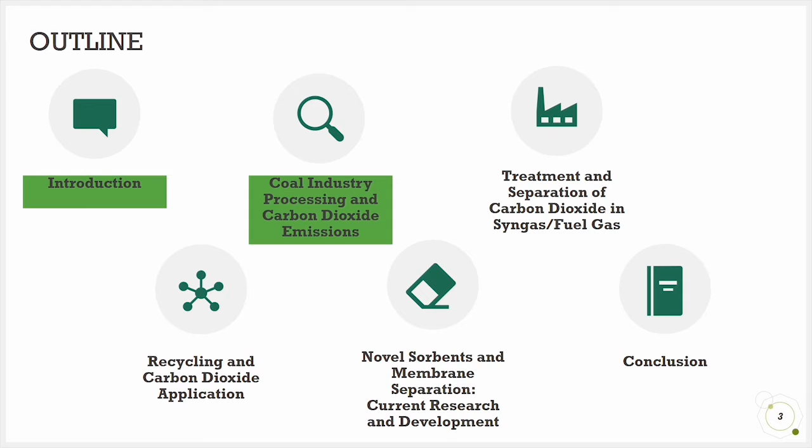Okay, next. This is an outline of our material. The first is about introduction, and then the coal industry processing and carbon dioxide emission. The next is the treatment and separation of carbon dioxide in syngas or fuel gas, and then the recycling and carbon dioxide application, and the novel sorbent and membrane separation, current research and development. And the last is about conclusion.

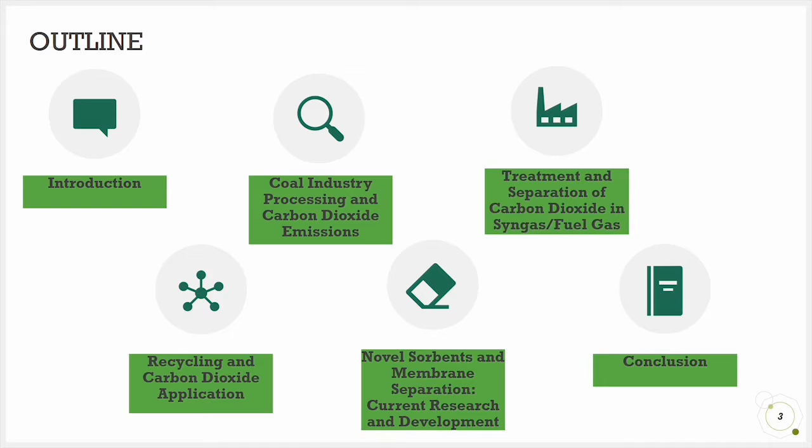The first is introduction. One of the issues that is trending is the addition of greenhouse gases, which causes global warming. Without greenhouse gases, the earth will be too cold and become an uninhabitable place. However, if there is too much CO2 in the atmosphere, global warming will occur. As a result, high sea levels can drown small islands, drought and floods, and so on.

The coal industry is one of the largest contributors to carbon dioxide emission for its unit of energy produced. Due to its high carbon content, coal accounts for about 44% of global CO2 emissions. In addition, according to International Energy Agency research, there was an increase in CO2 emission figures from 1971 to 2011, which are shown in the following graph.

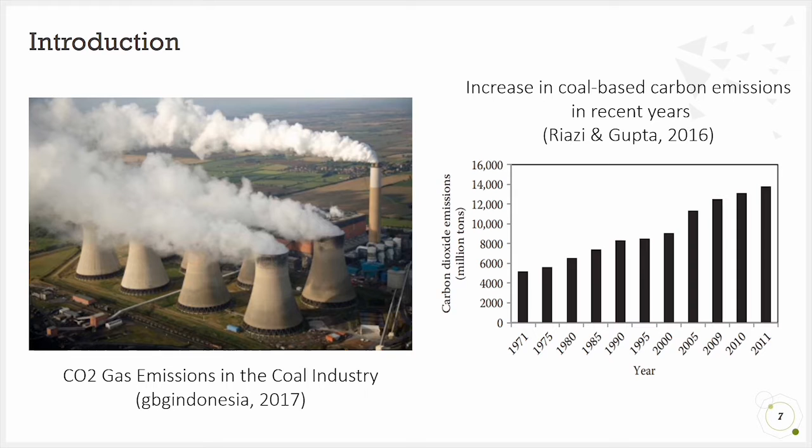And the next is coal industry processing and carbon dioxide emissions. Coal is an important source of energy, and the reliance on this fossil fuel for electricity generation is growing. The combustion of coal adds more carbon dioxide to the atmosphere than does the combustion of other fossil fuels. Because of a growing concern over the possibility of global warming, a phenomenon characterized by an increase in Earth's surface temperature, caused by increasing levels of greenhouse gases.

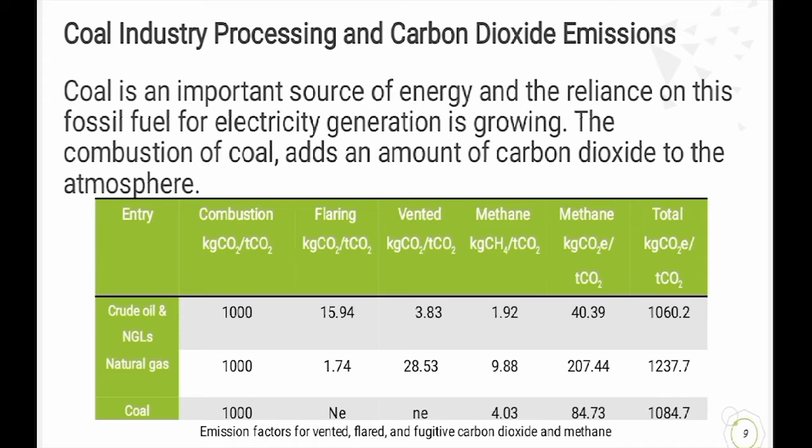And this table is emission factors for vented, flared, and fugitive carbon dioxide and methane. There are two kinds of ways of calculating the amount of CO2 emissions, namely calculation based on a stoichiometric reaction and a mass balance process. And this picture explains the mass balance scheme.

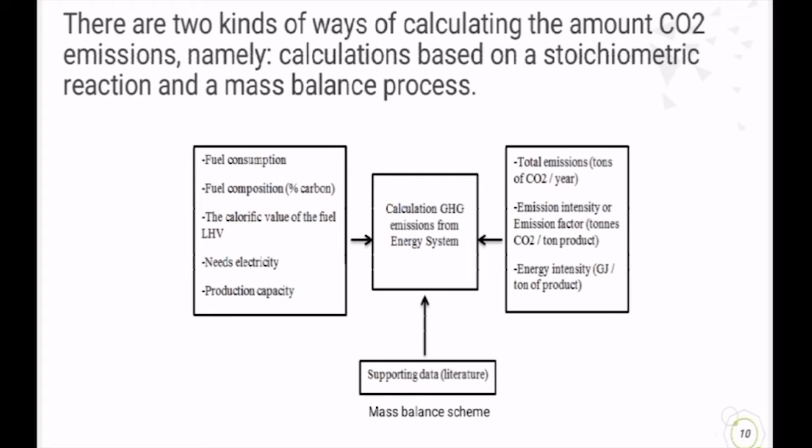And the next, there are various ways to process coal before combustion to produce energy, namely first PCC. PCC or pulverized coal combustion is a well-developed technology for coal-powered generators. There are many of its kind implemented around the world in developed and developing countries. Pulverization is needed to maximize the surface area for combustion.

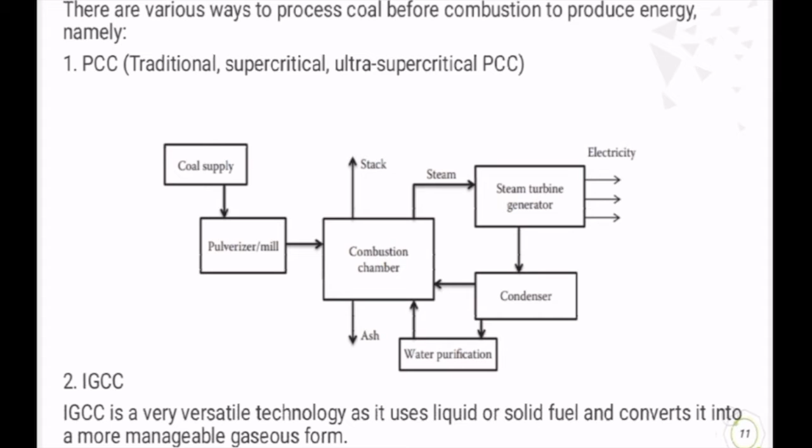And the second is IGCC, Integrated Gasification Combined Cycle, a less developed technology compared to PCC, but the benefits to the environment by IGCC are far greater. The following will give a description of the gasification of coal and the idea behind a combined cycle. And the third is FBC or fluid bed combustion.

FBC is typically implemented with PCC, IGCC, or oxy-fuel combustion to improve combustion or oxidation reactions. FBC is a cleaner method of combustion, but it sacrifices efficiency because of its low operating temperatures and the energy needed to fluidize the bed. Due to low combustion temperatures, there is no formation of nitrous oxide. FBC technology is also beneficial because it can use a variety of fuels such as low-grade coal, biomass, or waste-derived biomass fuels.

The last method is oxy-fuel combustion. While PCC and IGCC technologies require the separation of CO2 from the flue gas or syngas stream, oxy-fuel combustion is unique because it produces a highly pure CO2 that will require little or no separation. Rather than combusting coal using air, oxy-fuel combustion drives toward complete combustion by feeding pure oxygen into the combustion chamber. Thus, the reaction products will be water vapor and CO2.

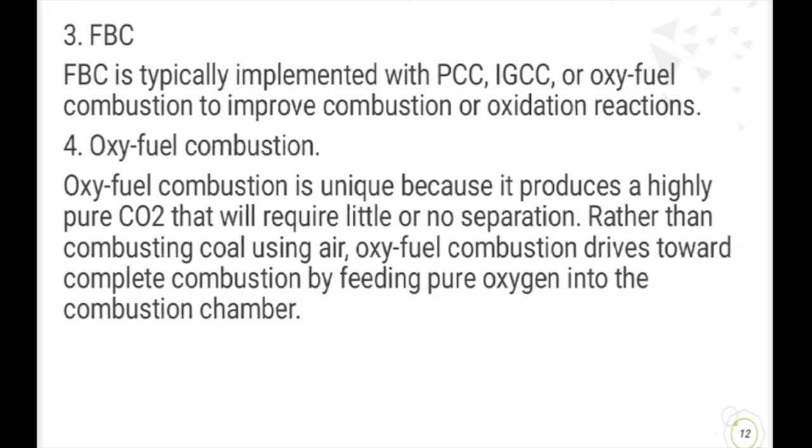The next material is about treatment and separation of carbon dioxide in syngas or fuel gas.

Carbon dioxide gas is an important gas for living on the earth. For example, carbon dioxide is important for plants because plants use carbon dioxide as raw material for photosynthesis. Carbon dioxide gas gives 50% contribution in global warming, while other gases like CFC give 20%, CH4 15%, ozone 8%, and NOx 7%. Carbon dioxide has the ability to survive in the atmosphere for 50 to 200 years. Carbon capture and storage, or CCS, is the most indicated technology to decrease the amount of carbon dioxide emission from fossil fuels, and carbon dioxide separated from flue gas can be used in enhanced oil recovery.

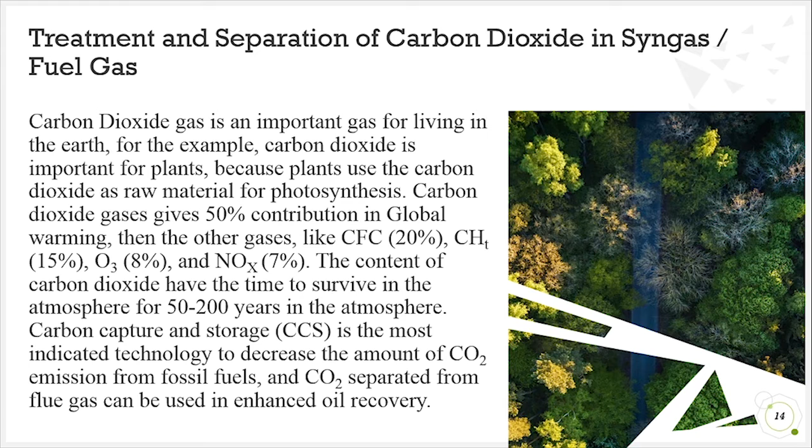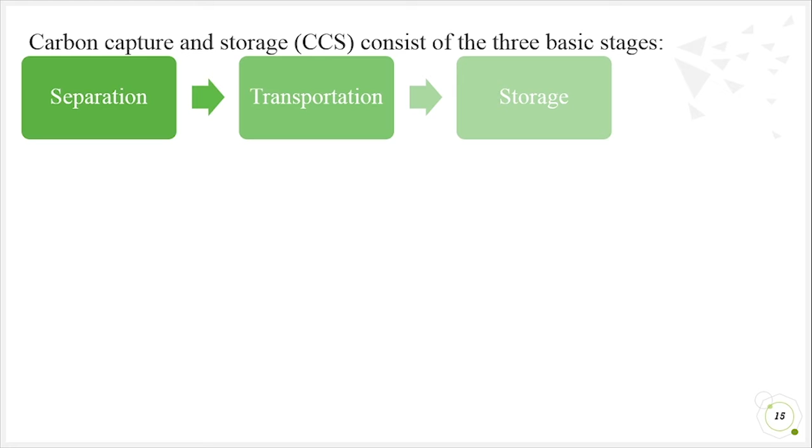Carbon capture and storage, or CCS, consists of three basic stages: separation, transportation, and storage. The separation stage includes pre-combustion capture, oxy-fuel process, and post-combustion capture.

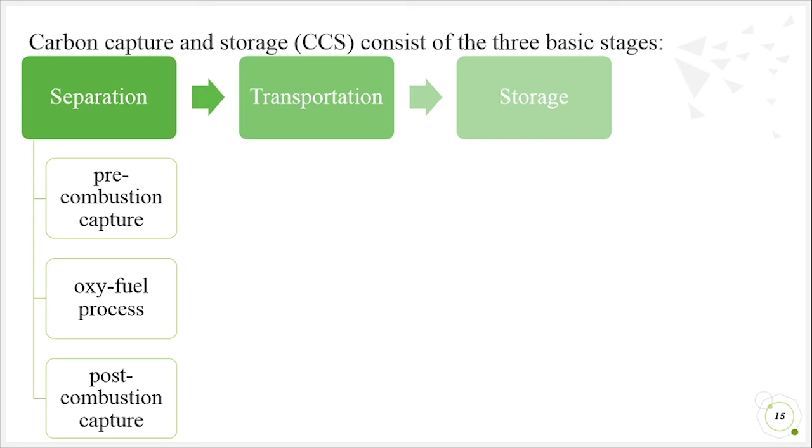Pre-combustion capture includes the reaction of a fuel with oxygen or air to produce a gas, mainly consisting of carbon monoxide and hydrogen, known as synthesis gas, syngas, or fuel gas. It is only used for IGCC, or integrated gasification combined cycle process, and is typically less energy intensive compared to post-combustion capture. The disadvantage of pre-combustion is that the system needs long-term development in a number of enabling technical areas to achieve target efficiency towards a hydrogen economy.

The second is the oxy-fuel process. In oxy-fuel combustion, pure oxygen is used for combustion instead of ambient air, and this results in a flue gas that mainly consists of carbon dioxide and water, which are separated by condensing water.

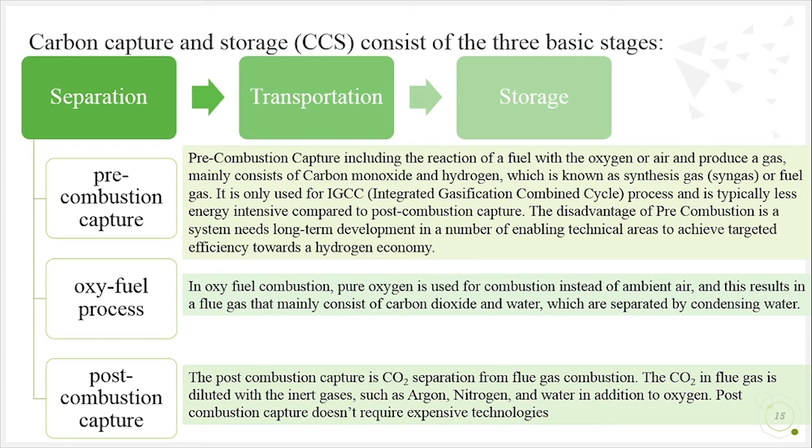The last is post-combustion capture. This is carbon dioxide separation from flue gas combustion. The carbon dioxide in flue gas is diluted with inert gases such as argon, nitrogen, and water in addition to oxygen. Post-combustion capture doesn't require expensive technology.

The next material is about recycling and carbon dioxide application, which will be explained by Dimas.

The next topic is recycling and carbon dioxide application. In its recycling and application, after it's been stored, carbon dioxide can be used directly or transformed into fuel.

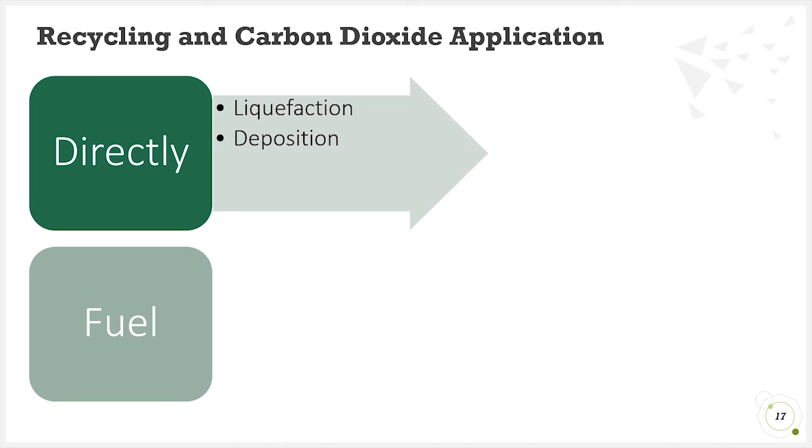In direct usage, carbon dioxide can be used in liquid state with a liquefaction process as a main compound in fire extinguishers, in solid state with a deposition process to change it into dry ice, and also directly used in a gas state as an injection in enhanced oil recovery process at the crude oil industry.

Carbon dioxide can also be transformed into fuel with a methanation process by reacting it with hydrogen compound. This will form methane and water as the result. It can also be transformed using an artificial photosynthesis process performed in algae, transforming it into biomass fuel such as isobutyraldehyde and isobutanol.

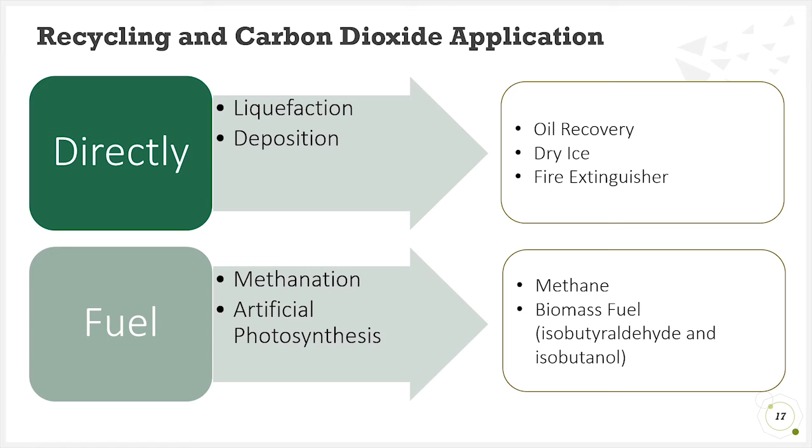The next material is about novel sorbents. The first one is zeolite. Zeolite is an aluminosilicate with a cavity crystal structure, which contains metal ions and water molecules, and can serve as a physical adsorbent. From the table, it's shown that zeolite 13X produced an adsorption capacity of 2.5 to 3 mol CO2 per kilogram at ambient temperature.

At temperature 350 degrees Celsius, the capacity decreased to 0.01 mol per kilogram. In the simulation, the comparison of the use of Selexol chemical and zeolite produced an efficiency comparison of 36.6% and 37%, where the use of zeolite as adsorbent is more effective than commercial adsorbent.

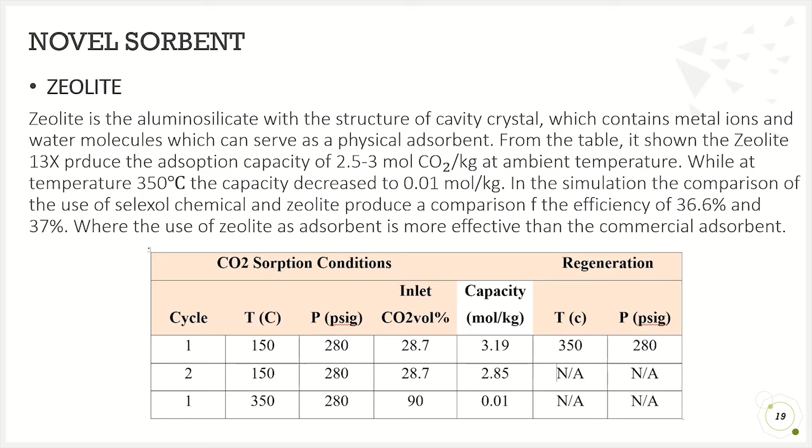The next is about metal hydroxide. Metal hydroxide is the hydroxide of the metal which are known as strong bases. Many kinds of metal hydroxide are made from hydroxide ions, such as FeOH2, NiOH2, CoOH2, and ZnOH2. The lack of metal hydroxide is that the price is very costly and it is easily degraded by water vapor.

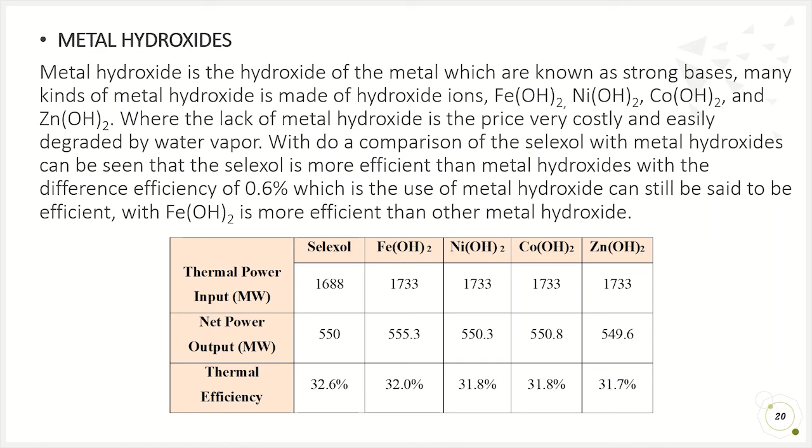In comparison with Selexol, metal hydroxides can be seen to be less efficient than Selexol, with a difference in efficiency of 0.6%. Still, the use of metal hydroxides can be said to be efficient, with FeOH2 being more efficient than other metal hydroxides.

The next is about membrane separation. The use of membranes for gas separation is very promising in the field of research because it compensates for the problems associated with the MEA process or Selexol process currently in use.

The energy load from carbon capture is much less than with previously discussed methods because the membrane doesn't require intensive heating and cooling. The challenge faced by the membrane is the large degradation difference at high temperature and reduced purity performance.

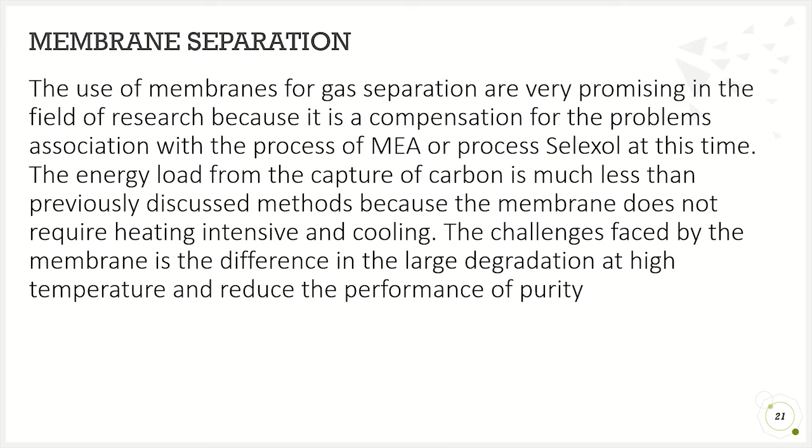From membrane separation, the first type is pre-combustion membrane capture. Pre-combustion membrane capture of CO2 is considered a promising option to reduce environmental pollution from burning coal, because the energy required is relatively low, and there is good prospect for the use of hydrogen in power generation and industrial sectors.

From the diagram below, we can see that syngas out of the WGS reactor consists of H2 and CO2 at high temperature and high pressure. This is because the metal or inorganic materials are thermally stable when operating at temperatures above 300 degrees Celsius.

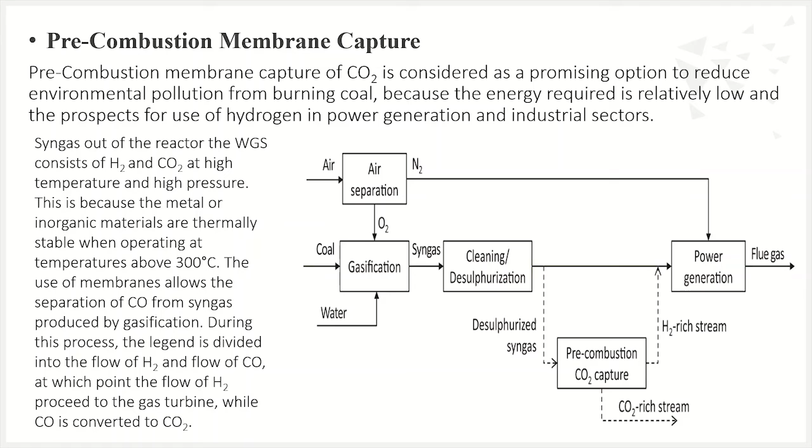The use of membranes allows the separation of CO from syngas produced by gasification. During this process, the flow is divided into the flow of H2 and the flow of CO, where the flow of H2 proceeds to the gas turbine, while CO is converted to CO2.

The next is post-combustion membrane capture. This process treats the flue gas flow, which has low pressure and low CO2 content, diluted with nitrogen. The advantage of post-combustion is that the principle can be applied to any emission source, for example power generation, cement and steel plants, and petrochemical plants, including retrofit applications.

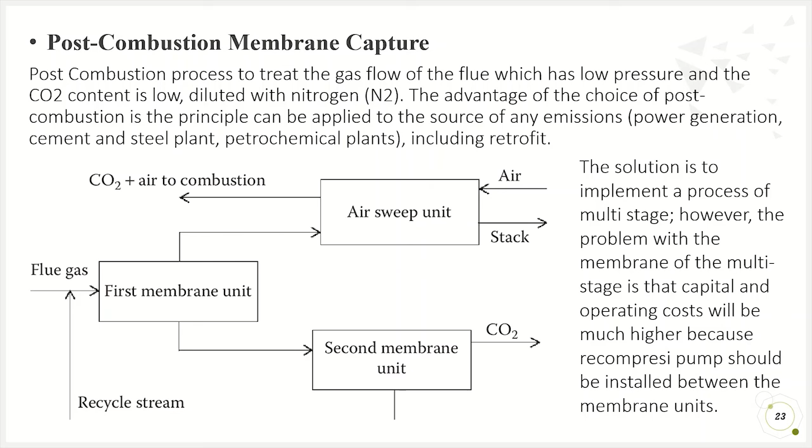The solution is to implement a multi-stage process. However, the problem with multi-stage membranes is that capital and operating costs will be much higher, because recompression pumps should be installed between the membrane units.

The next is membrane contactors. Another use for the membrane is for non-selective and non-reactive absorption. This improves the absorption of the gas-liquid so that the size of the facility area will be smaller, and the price will be cheaper.

Currently, operating a single membrane contactor system is limited because the technology can only handle a certain volume of gas. However, a hybrid system, such as the use of membrane contactors with absorption, can be an alternative additive to the conventional carbon capture process.

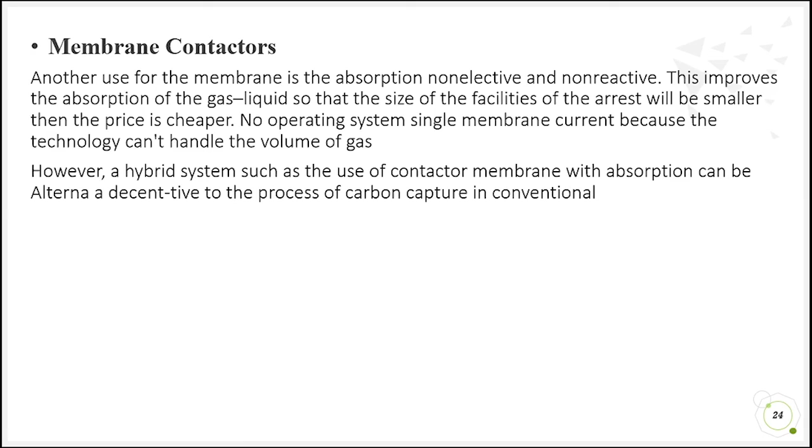And the last part is the conclusion. Carbon dioxide emissions from the coal industry are getting higher nowadays because of their slow-to-degrade characteristic, and their use is increasing, making carbon dioxide pile up even more.

To manage it, carbon dioxide is captured after it is emitted and stored in storage. This process needs good separation in order to maximize the capture of carbon dioxide, such as membrane separation in post- and pre-combustion. After carbon dioxide is stored, it can be used directly or processed further.

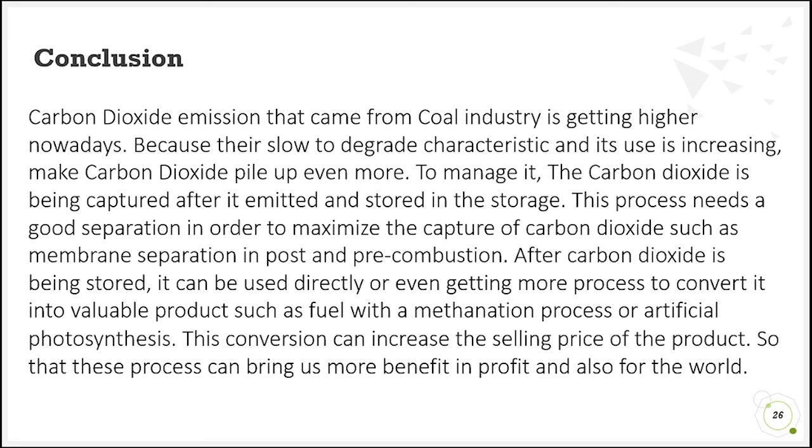It can be converted into valuable products such as fuel, through a methanation process or artificial photosynthesis. This conversion can increase the selling price of the product, so that this process can bring us more benefit and profit, and also benefit the world.